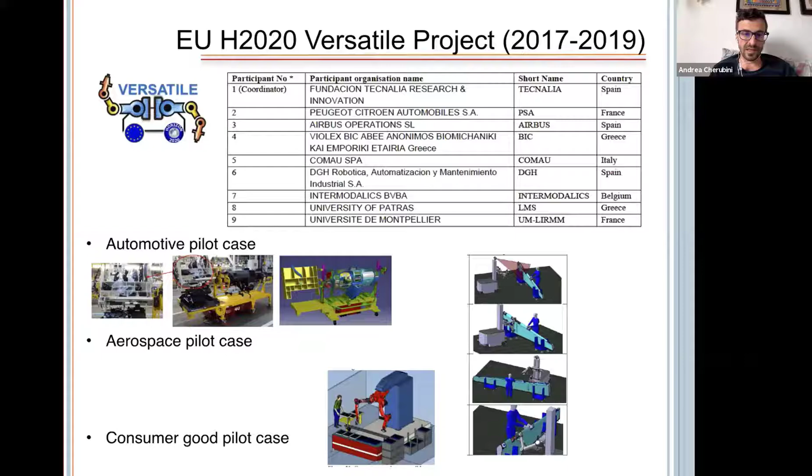The research on this was inspired by a first European project which we obtained in 2017, which was named Versatile. The project targeted some industrial applications where we wanted to push the physical human-robot interaction into the factory of the future in a flexible process, typically with three main pilot cases, which were from the automotive, aerospace, and consumer good industry. And this led to the design of a cobot, so a collaborative robot in University of Montpellier called BAZAR, which you see here, which is composed of a dual arm system with two shadow hands and a bunch of sensors and an omnidirectional base.

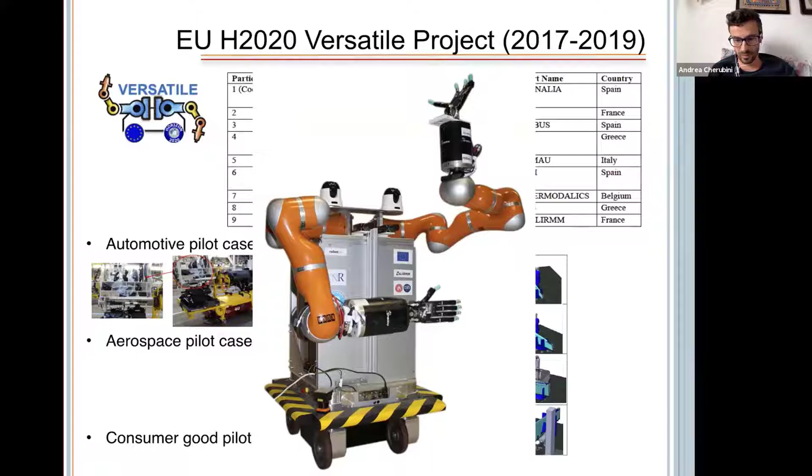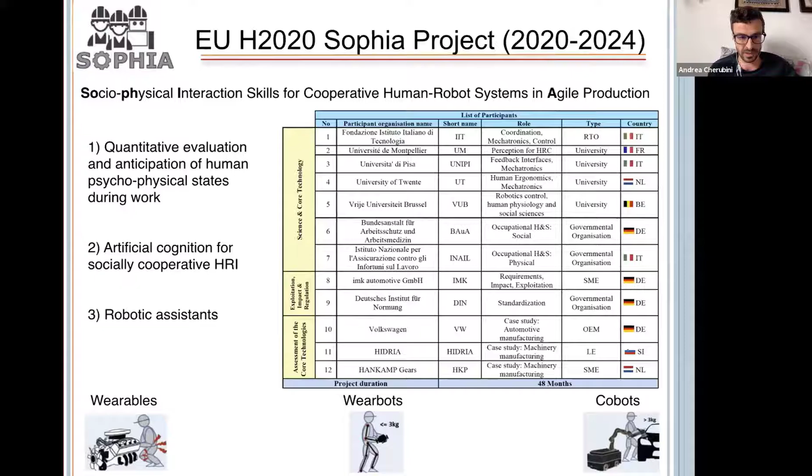Following this, we had a second project, Sophia, mentioned by Arash, who is coordinating it at IIT. The goal here was more focused on ergonomy, so social physical interaction skills, in particular dealing with how to anticipate psychophysical states during work and in the context of heavy tasks in the industry. So the goal of the project, which started less than a year ago, is to design wearable systems, wearbots, and collaborative robots, which can help the workers in the factory of the future.

So the context of physical human-robot interaction, as I think you all know, is on one hand to reduce the ergonomic problems which are encountered by humans in various contexts, both in service and industrial environments, by merging on one hand the skills which are specific of humans, which are adaptability and precision, and on the other hand, the robotic power and speed.

So we can distinguish basically two types of tasks, the divisible and interactive ones. You can see in this image on the left a divisible task where the robot and human work separately, but on the same part. And on the right, you see an interactive task where they are working together on the same part. So there can be contact or not, and the contact can be desirable or not. In the case of physical collaboration, on the other hand, the contact is really desired and it is aimed at achieving a common goal.

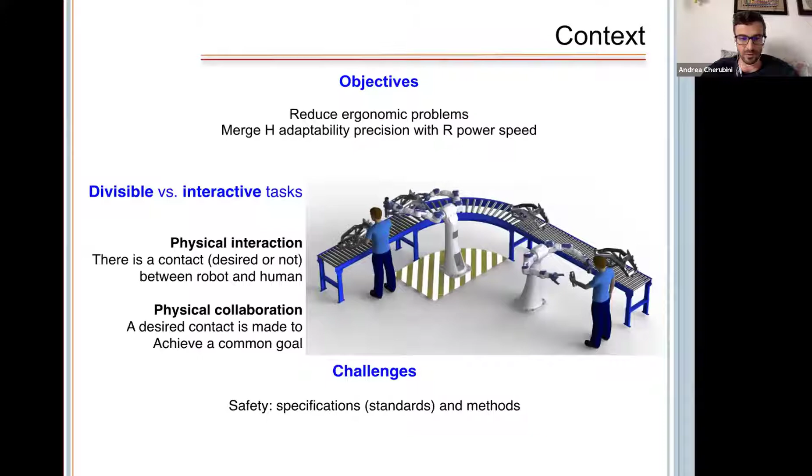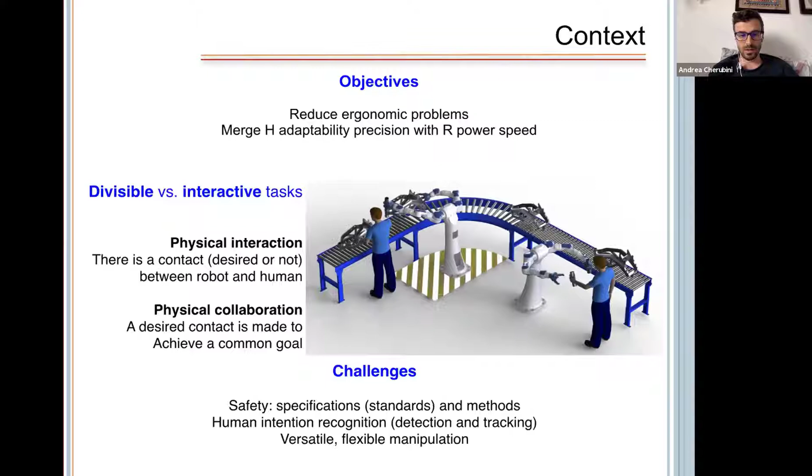So we have some challenges. In my opinion, the most important ones are safety. For this, there has been a lot of work, much of it coming from Sami's group, about specification and standards for safe robots. There has to be human intention recognition, so you have to detect and also track over time what the human intends to do. And finally, you want the robot to be versatile and flexible and to deal with a very varied range of objects and situations. So I will address these three challenges separately in my presentation, starting with safety.

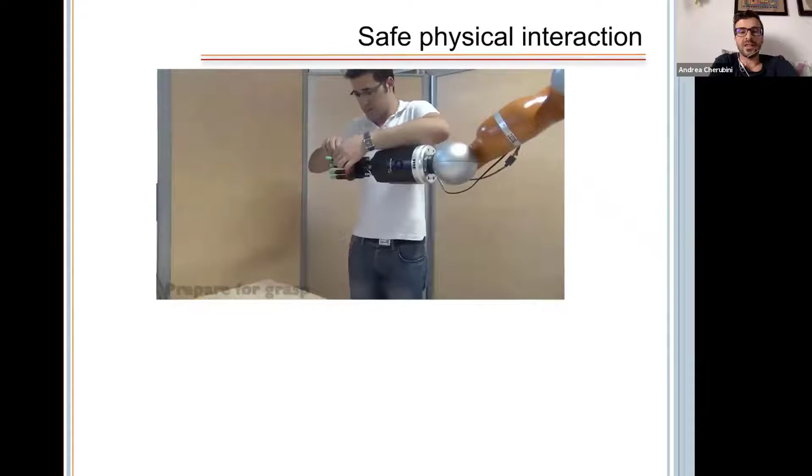So I hope you can see here somehow. But mainly this is work we did a few years ago. We presented this dummy industrial scenario where we wanted the robot to help a human in a drilling task.

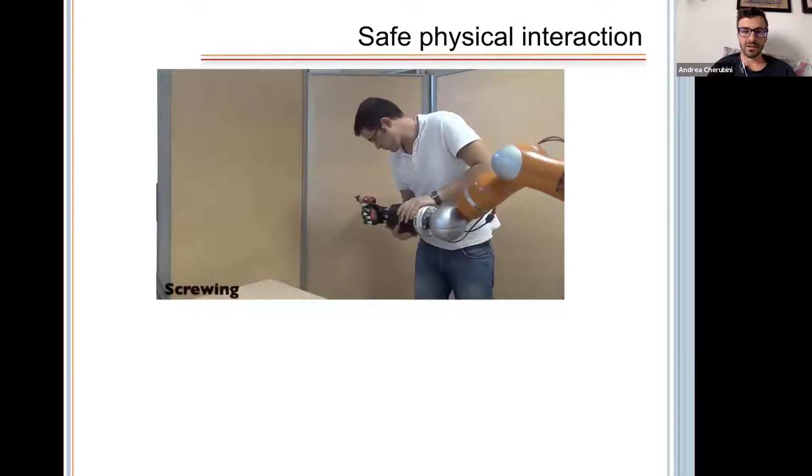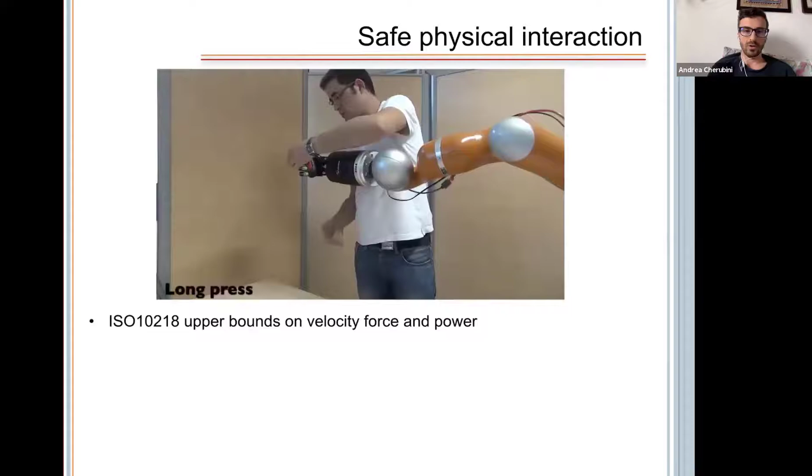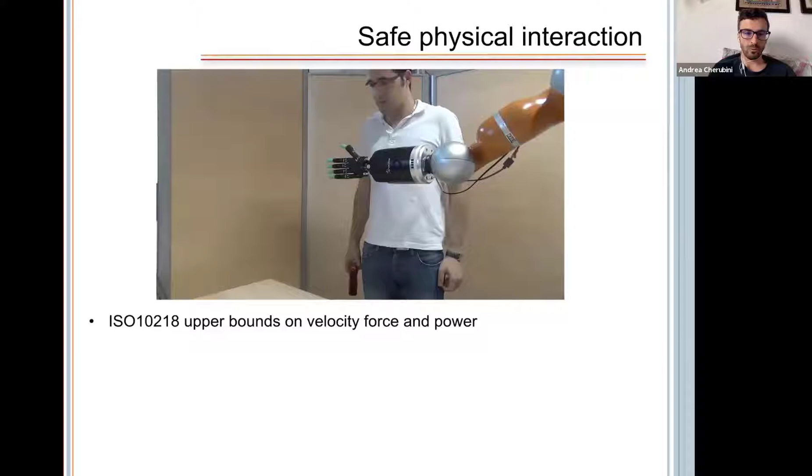So the driller is activated by interacting with the tactile sensors of the robot. The main contribution here was to present a framework which could deal with the ISO standard on safety, which was ISO 10218, and which required some bounds on velocity, force, and power. So to do this, we used an adaptive admittance controller.

So admittance control, as you well know, was conceived by Neville Hogan and also mentioned by Sami earlier. So we'll have the pleasure to hear Neville later today.

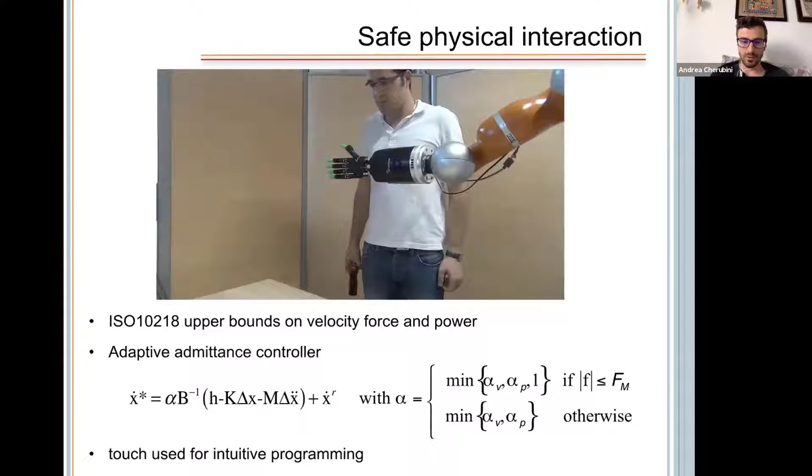And we adapted the controller by using a tunable alpha parameter, which could fulfill either the bounds on velocity, on force, and on power. So at each time, the robot was capable of fulfilling the ISO standard. Nowadays, I would certainly use constrained optimization to do this, but at the time we went more via this. Of course, again, on admittance control, but rather than having this self-tunable parameter, we would use optimization. And we were using touch for intuitive programming.

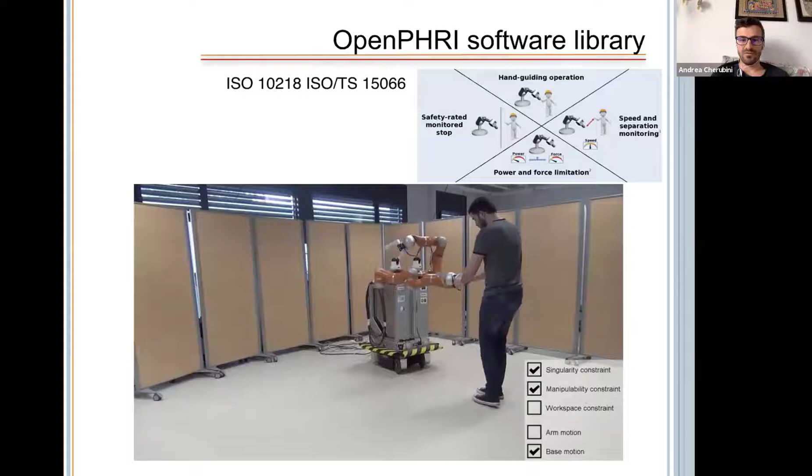Following this work, we developed the software library. So this was mainly the work of Benjamin Navarro, who you see here, which was called OpenPHRI, which enabled easily deployable physical human-robot interaction applications. So you can find this library on GitHub. And it's, of course, open access and open source.

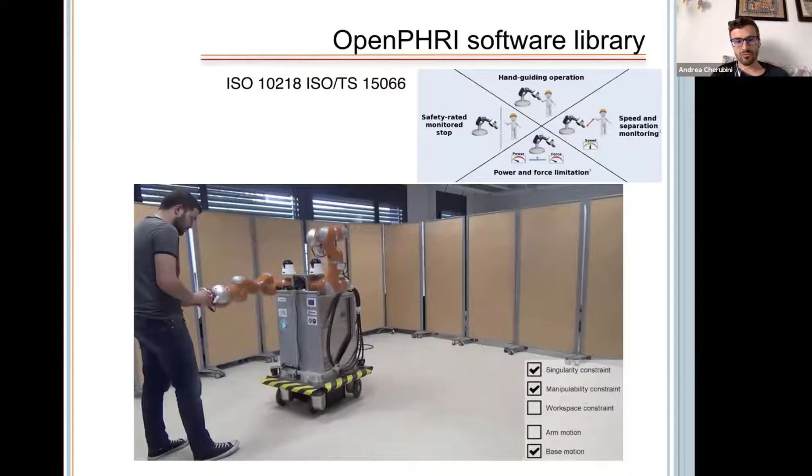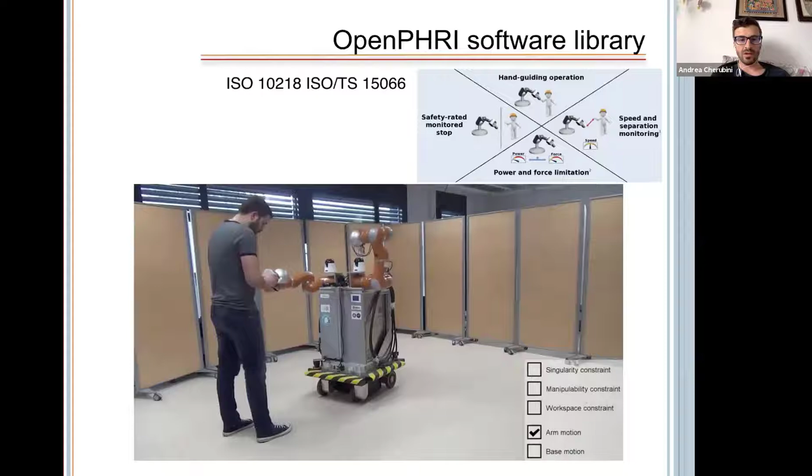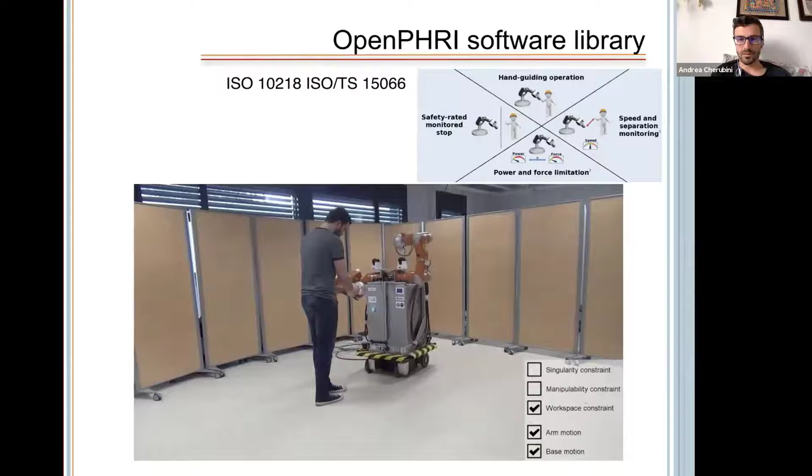In this example that you see here, we're dealing with a highly redundant robot. The robot can move its base, but also its arm. So according to the task, according to where Benjamin puts the end effector, either the top or the bottom of the system are actuated. And this is one of the many features of the library. The other ones are mentioned in the top right and are also focused on the ISO standard.

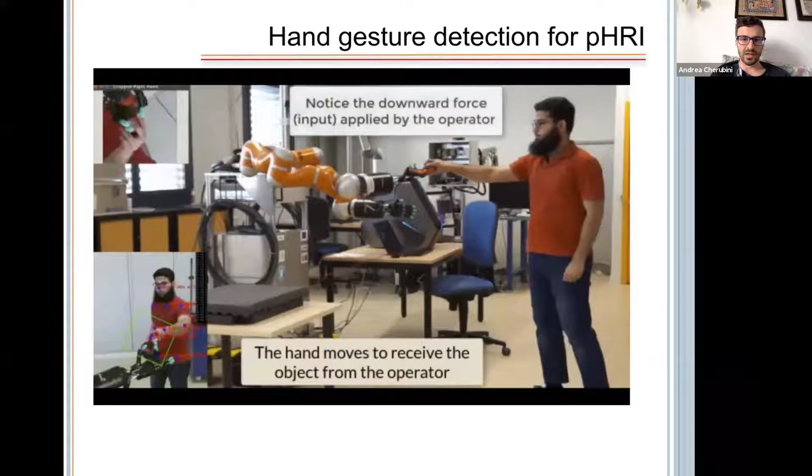For the second challenge, human intention recognition. So here we did a lot of work on vision. So in this video that you see here, we trained the robot to recognize American Sign Language signs, which are shown to the robot, and this enables the system to be easily reprogrammable on the fly by the operator. So each sign corresponds to some action that the robot should execute.

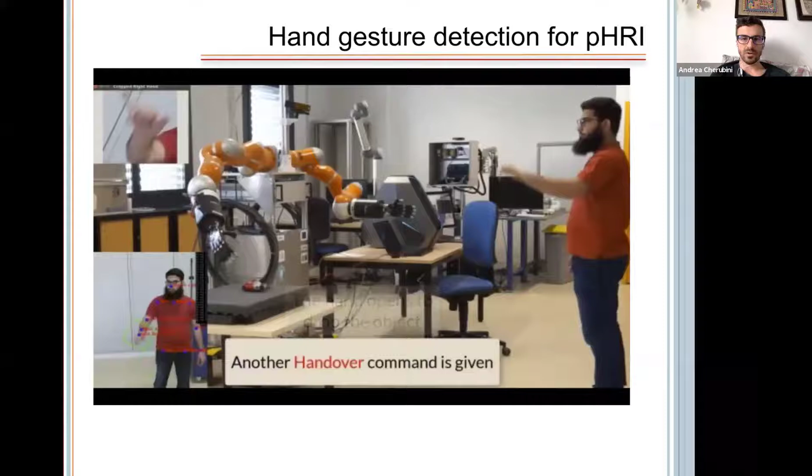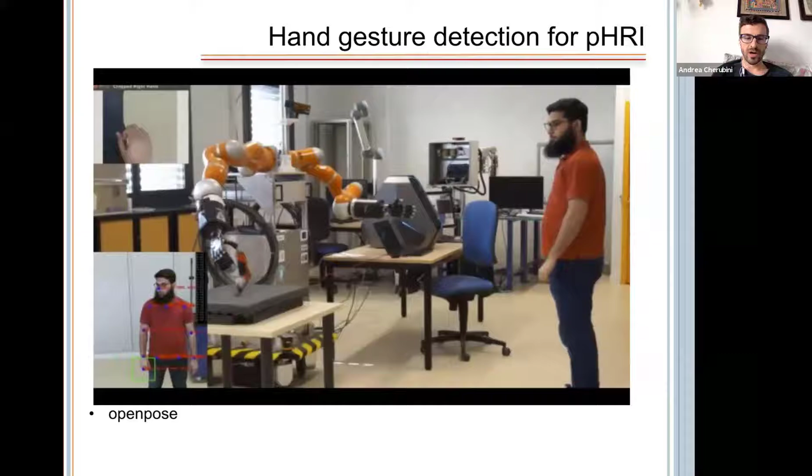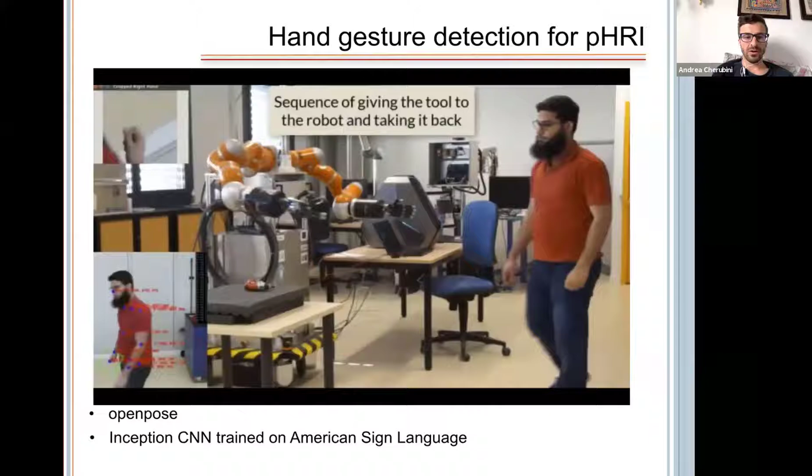And to do this, we use OpenPose, which you may know is a very interesting software library developed at Carnegie Mellon for detecting human skeletons on images. And the OpenPose skeleton tracker is used to first detect the hand of the user. And this hand, which you see in the top left of the image, is used to train another convolutional neural network on sign language, enabling the system to recognize on the fly the signs at 5 Hertz.

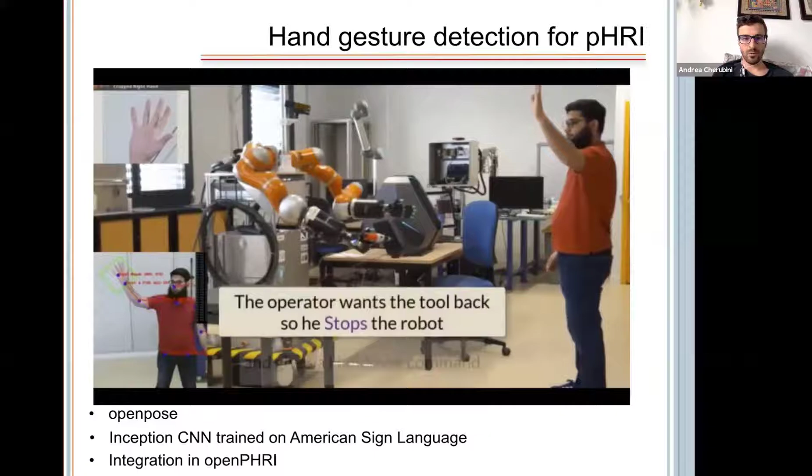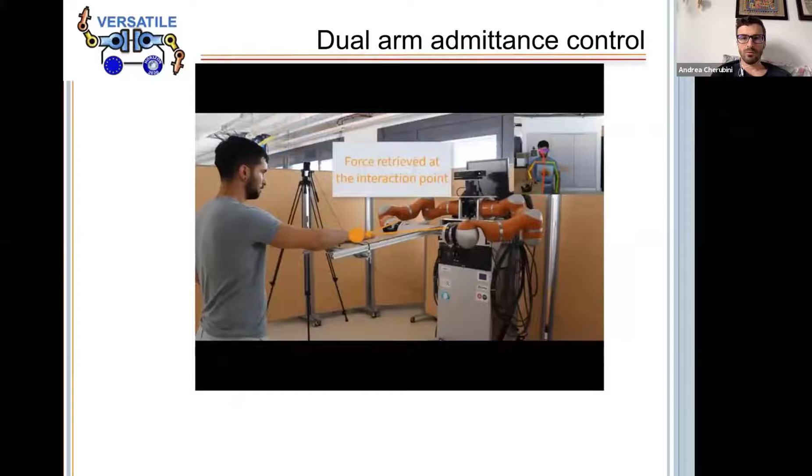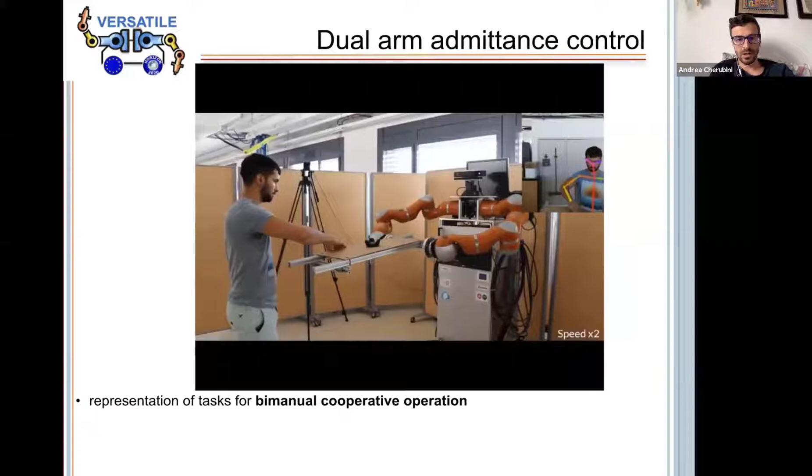And this was integrated in the OpenPHRI software library, enabling smarter physical human-robot interaction, which doesn't require direct touch with the human. Other work has been done in the context of the PhD of Sonny Tarbouriech, which you see in this video. So Sonny was working on extending the admittance control framework to dual arm. So here he developed the generic representation of bimanual task framework, but for cooperative operations.

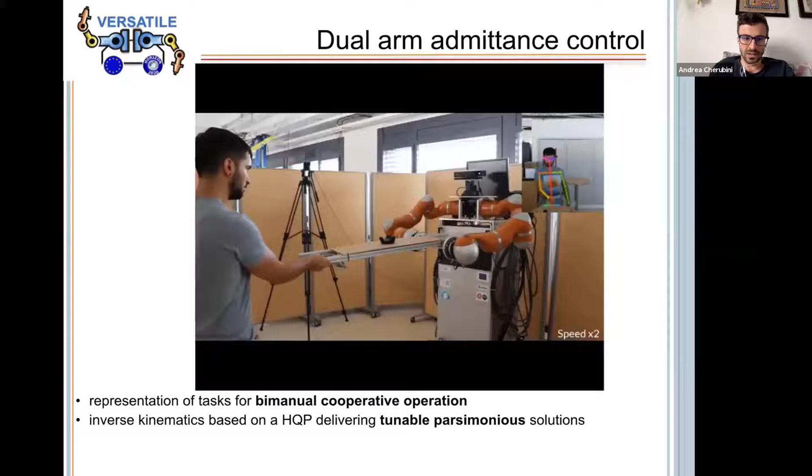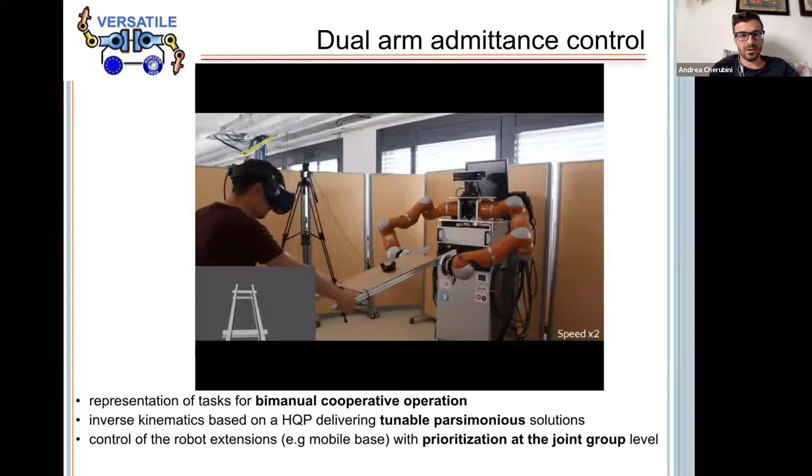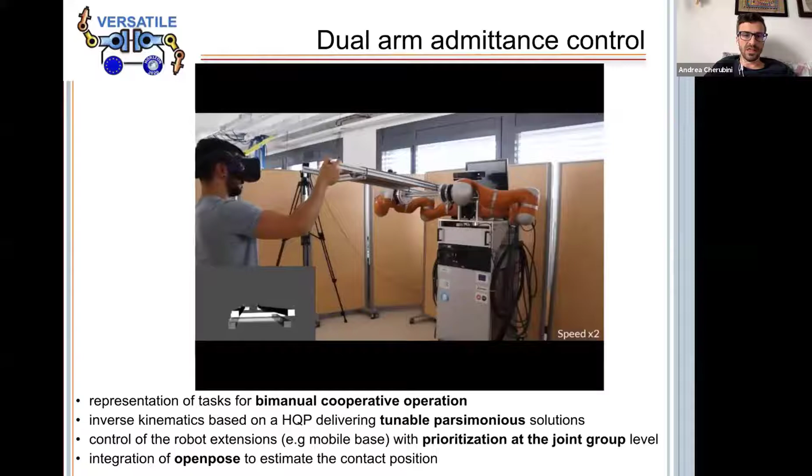So we're extending admittance control to the bimanual framework, and he was using inverse kinematics based on hierarchical QP, and he can control a very sophisticated robot, including a mobile base, by using prioritization at the joint group level. One interesting feature of his system is that he can detect the contact using the OpenPose library, which I mentioned previously. And using the contact detection, it is easier to infer the intention of the user.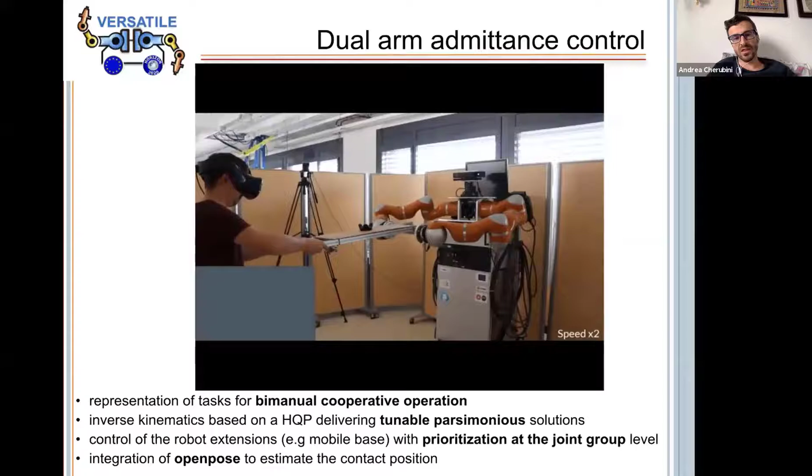These are some examples where the humans are using a virtual reality, augmented reality system to validate their task, which is a collaborative carrying task. I will now go to the last part of the presentation, which is about versatile and flexible manipulation.

So we did some work on haptics. It's still on physical human-robot interaction, but I would say also related to the environment. Some things can be applied also to humans, but in particular on how to make the robot interact with objects and the environment as a human would. So the first work on this was zero-shot haptic recognition. So you may be familiar with the multi-class classification problem, which consists in classifying objects, and it has been very much popularized by the vision community recently with the advent of deep neural networks.

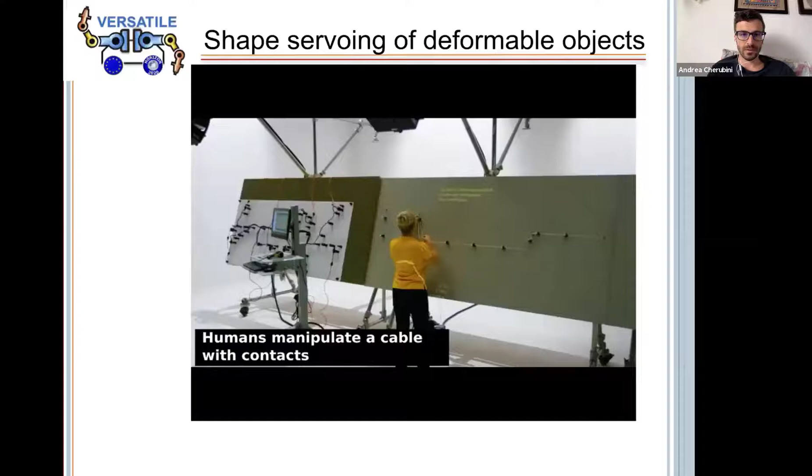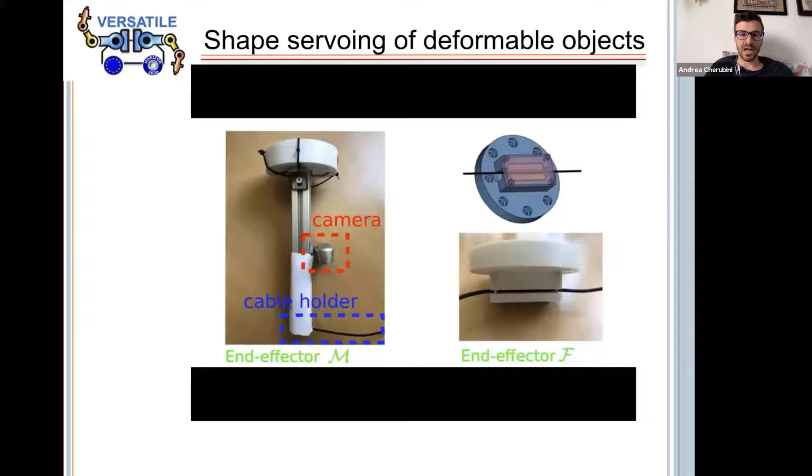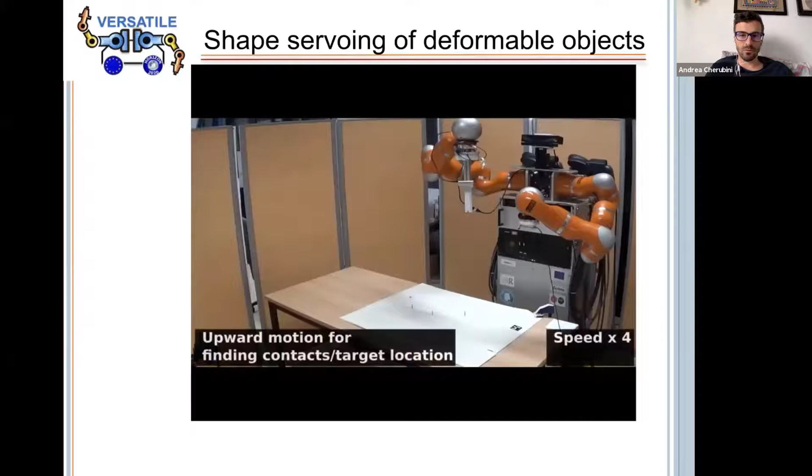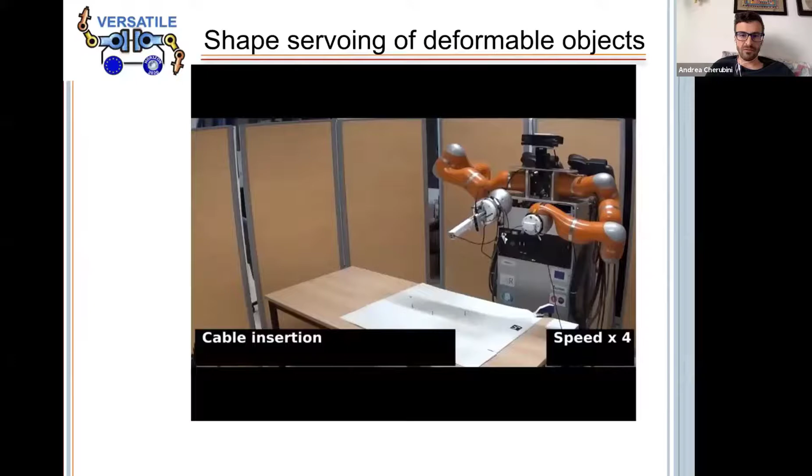So this first work by Jihong Zhu was exploiting the contacts in the environment to do the shaping. So we use visual control and planning strategy here, as well as a formalism developed by Jihong himself called the contact mobility index. And with this, in this context, it's possible to design the motion control such that the cable can be set along the contacts, as you can see in the video.

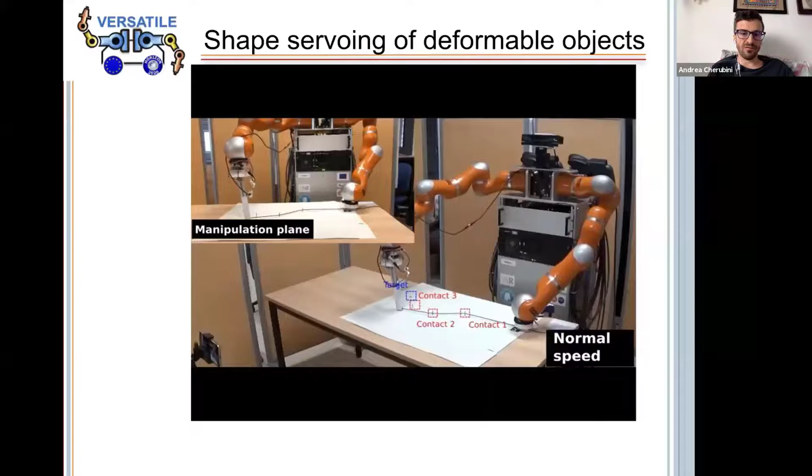So this work is positioned in a more general framework of research that I'm carrying out on shape servoing of deformable objects, mainly using vision, but we're also looking at touch, and which can be also extended to physical human-robot interaction in the context, for example, of medical robotics, if you look at needle insertion and also surgery on persons. So here we're looking at the contact mobility index, and it's a planning and vision-based framework that was applied to realize this challenging task.

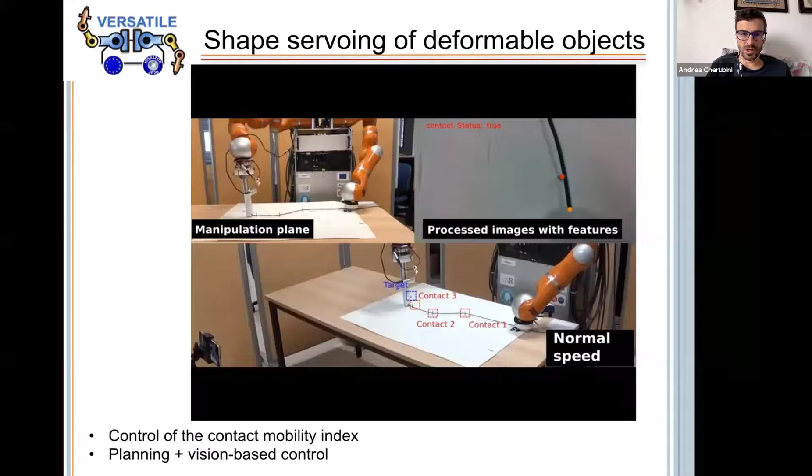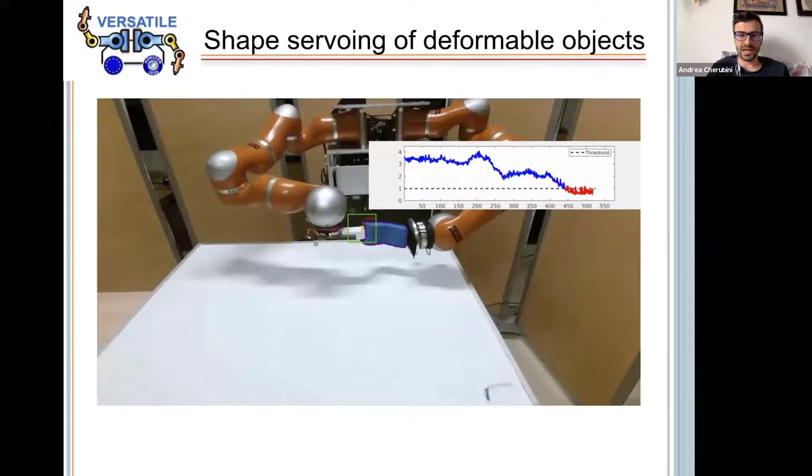Future work consists in developing a generic framework which could address both rigid and soft objects. So here you can look at some results where this time the shape of the cable can be obtained by manipulating the object. These are very recent work by Jihong. And here, this is a sponge, so it's an elastoplastic object which can be shaped, and using exactly the same controller without changing anything, we can also servo soft objects.

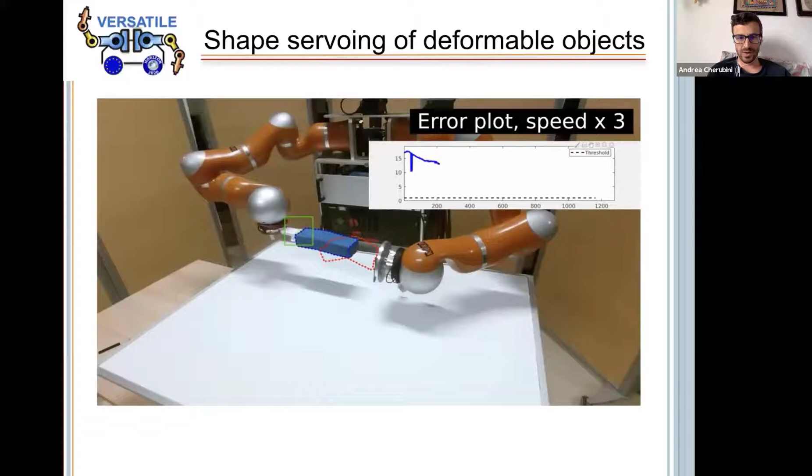So the idea behind this work is to use a PCA to extract a subspace of features. In this last example, the object is rigid at the beginning and flexible when it touches the environment, so it can be modeled in both cases, and the system is successful. And here we show a failure case.

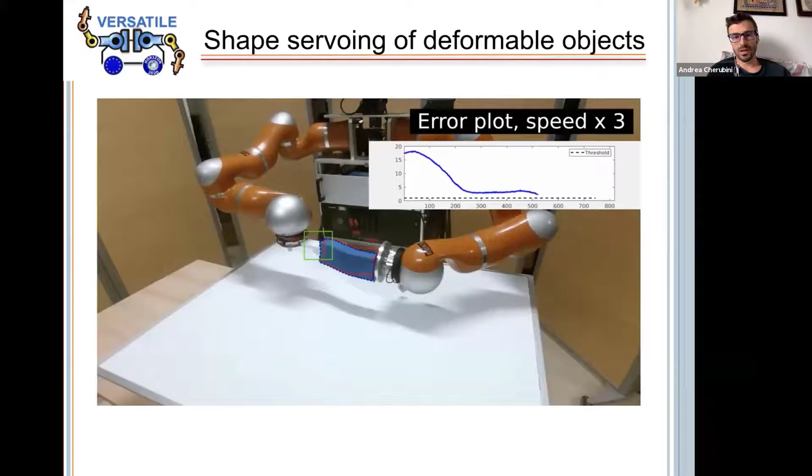So I was saying we use a PCA to extract the features, and we are also estimating online both these features from the PCA, and also the dynamics which relate the control input with the evolution of the features, what is called interaction matrix in traditional visual servoing.

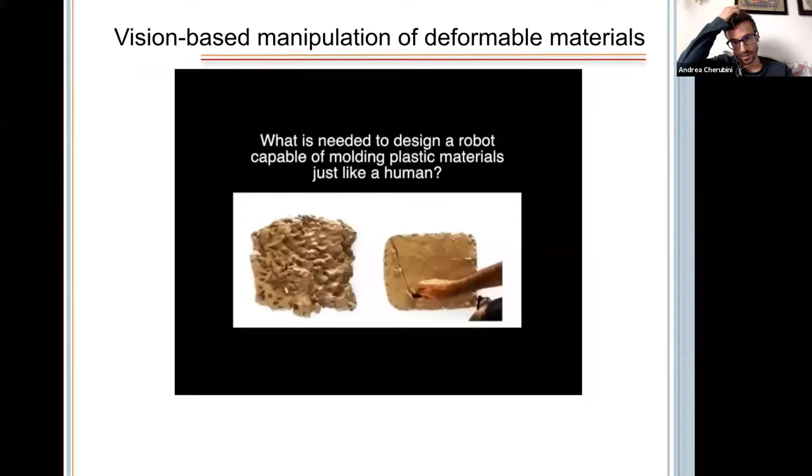In the same context, I also worked on other types of objects which are elastoplastic, such as this type of sand. This was during my sabbatical at QUT in Brisbane, Australia, 2 years ago. So here the goal is to find the actions which can modify the environment online

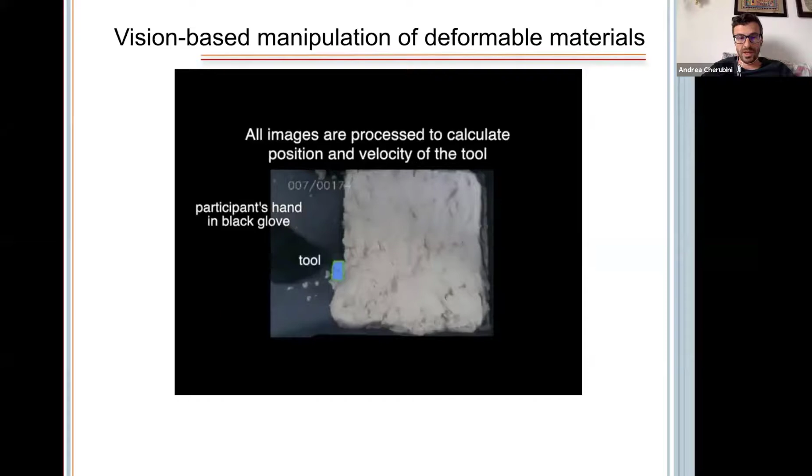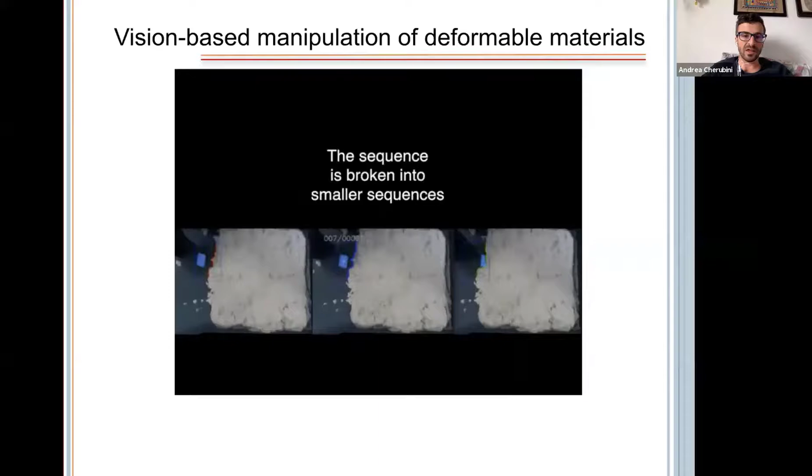by using vision alone. So first we acquired a series of images of humans realizing similar tasks, and these images were processed to find the states and actions which were relevant for the task.

And then using some various techniques, we could map the state evolution with the action which was required in order to deform the soft material. So it's a model-free approach, which we are currently looking at applying to a model-based method using finite elements.

And the work was published in ICRA this year.

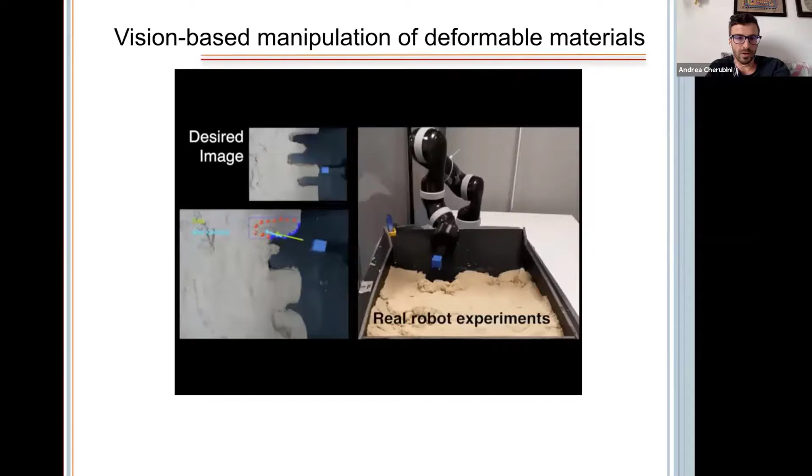And we could finally deploy it on the robot. So here we see the robot, which has to realize the image shown in the top left. And to do so, it concatenates a series of actions depending on the contours it sees.

And another currently explored research work in this context is to use a robotic hand to extend the actions which are possible. So the ultimate idea is to really be capable of doing complex hand operations to manipulate this type of materials.

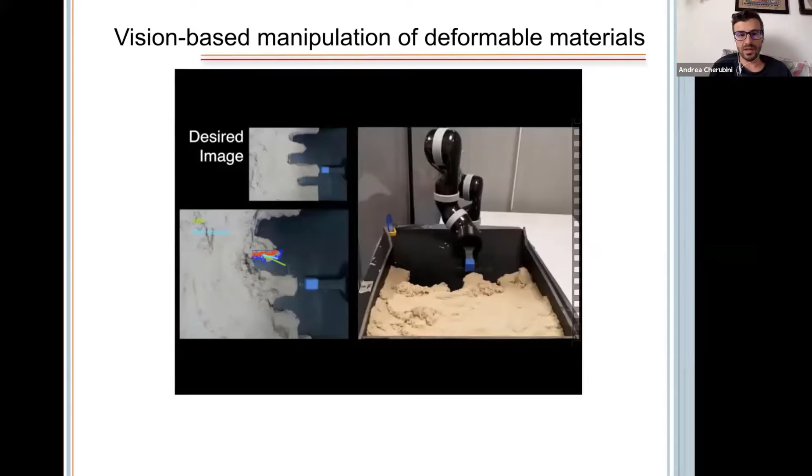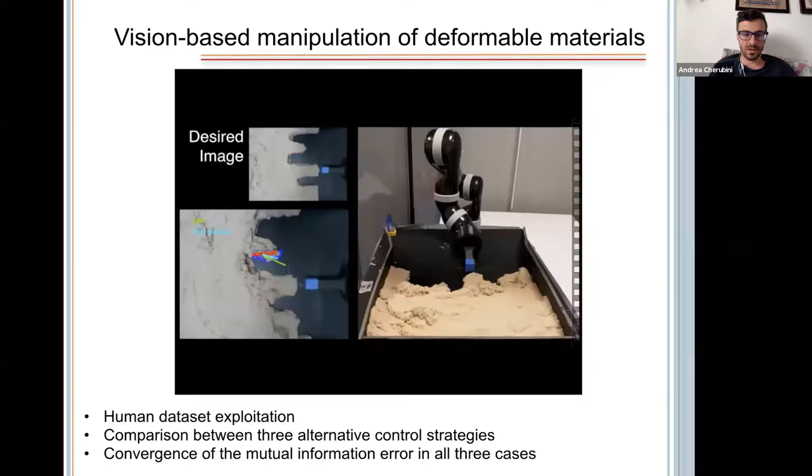This is a bit what we mentioned about exploitation of the human data set, comparing different strategies, and the convergence of the mutual information proved that our system was efficient.

So to rewrap, we had safety, human intention recognition, and versatile and flexible manipulation, which are the main challenges of our work. And this is just to conclude.

Okay, thank you, Andrea, for a very interesting talk. We have time for one or two quick questions. One question came from Samit, who comments on the scenarios, which are nice, and he asks, what is the time to react in these scenarios? And I think it is actually referring to the collaborative tasks.

You mean the ones with the gestures? I'm not sure. Maybe, Samit, can you please elaborate more? Probably on the collaborative task, co-carrying gestures, maybe yes in general, unless we're waiting for his detailed question, but yeah.

Well, in general, okay, our goal in all these works is of course to work in real time, because we want the collaboration to be relevant for the human. So this was a big challenge in the gesture recognition work, which of course had to be transferred to real time.

There is an issue when roboticists want to use, well, it was historically when roboticists wanted to use image processing and computer vision systems, and it is now the case with deep learning. It's that these communities generally provide excellent results, but they are rarely in real time. And of course, we have a real time specification. So we are always confronted with this when we try to transfer vision methods to robots.